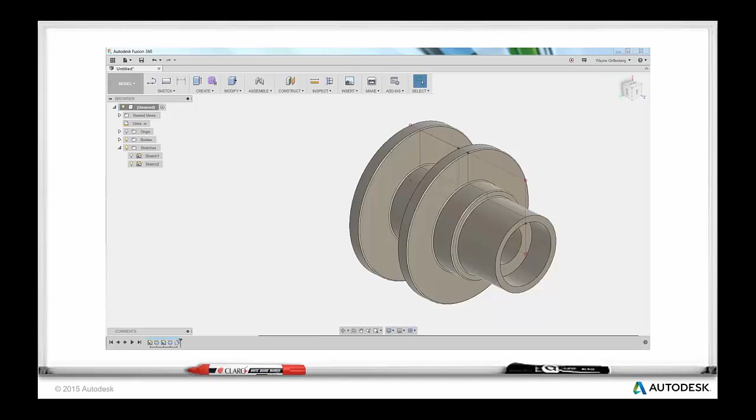Okay, this is the basic part we're going to draw up, a simple pulley, and revolve it around. And then we're going to put some toolpaths, some contour toolpaths, a facing toolpath, grooving toolpaths, and then we'll even get a boring bar to show you how to bore out the internal components of the part. So that's what we're going to do. So let's just jump right into it.

I'm going to bring you into Google. So I'm going to log into my project. I'm going to go over to this Fusion Team. When you start to work with your projects, you're going to get into a hub. And in the hub is where you're going to save. You're going to log in and save your project when you initially start working with Fusion.

I have some projects here that I'm working on, as well as I can see activity of what's happening in those projects. Some of these are shared with me, some of them I share with others. And they were able to invite me. I can go in and log in and see some of the parts. And when you invite somebody to your project or your hub, you can control the access they have, whether they can create projects, edit parts, change parts, or even upload parts into your project.

So I'm going to jump into this Fast Track to CNC Programming. And these are some of the parts we did last week. And I can also see that the project member is me, and I can add and invite others simply by putting their email in here to send out the link that they can add through their email. I can add them into this project. They can join in, and I can manage what level of access they have.

I can also see these projects in a different way. If I go into the grid view, I can see I have some folders here as well, and I can also see I have some parts that we worked on last week. So we downloaded this vise. We were able to turn it into an assembly inside of Fusion, and we were able to bring this part. We created an adapter plate for going from a carburetor to an intake manifold, and I was able to bring it into that assembly and machine it.

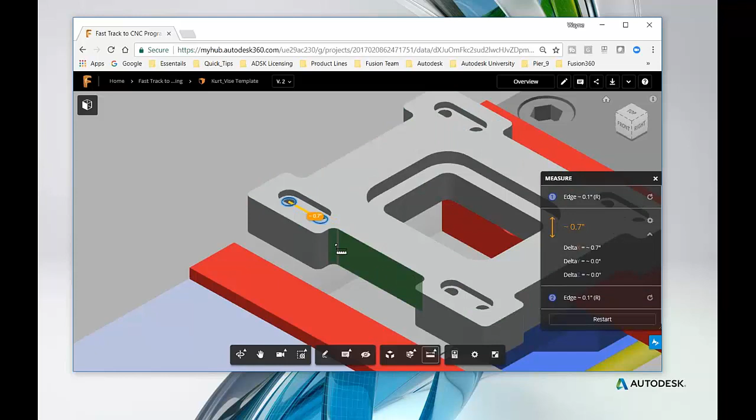If I wanted to get a section view, I can easily do that too. I can say I want to add a section view through the center plane here. I can drag it and I can see what's going on, let's say, inside of those holes right there. I can even see a different angle in that section view, and I can just flip it around like this and I can see it right in the view inside of my browser here. So I can turn that off.

I can also go and do an exploded view. So if I want to explode out and I want to see what the assembly is made out of, I can easily do that. You could set yours up if you want to look at the functioning or what's inside of one of your components or your assembly. You can easily do that here as well.

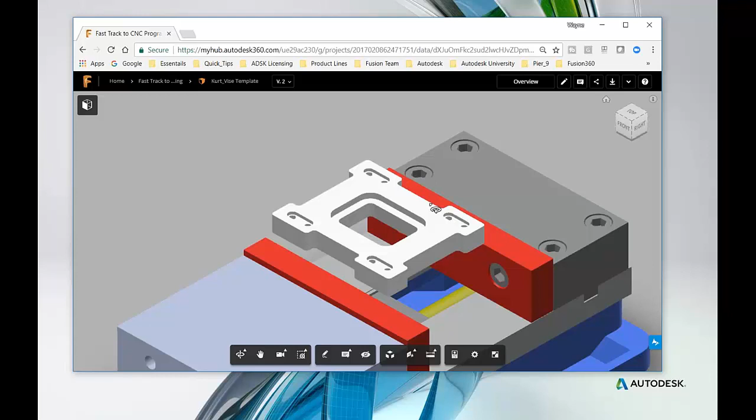And again, I can share this with anyone. If I want to share this, I can just simply go up to share, and I can send a link to a customer, to a colleague, to anybody I'd like to come in and see what this looks like, simply by copying this link and sending them.

I can choose whether I want the people that I'm sharing it with to be able to download the assembly to their computer, and if I do, I can also choose to have them put a password in that they'd have to plug in before they can download it. Or you can simply turn that off and allow colleagues to be able to download freely or get into the project. So I'm going to close that out.

There's also ways, if I want to export, just to let you know, you can export to many different file types right from this browser view. It'll export that assembly out as different archives and different types of exported data.

If I wanted to edit it, just to let you know, we do have the preview where you can edit right inside the browser. It just adds flexibility for you to be able to design. Say you're not in the office, you might be on your iPhone or your iPad. Well, actually, in this case, you wouldn't be able to edit it on your iPad yet.

But if I had a Mac, I can open it inside of my browser on the Mac, or I can open it on my laptop if I'm away from the office and do basic edits on the parts, and be able to add that so my colleagues can see it. So when I get back into the office, I can save that idea. So it adds flexibility. But right now, it's only in our preview mode today.

I can also edit on the desktop, which we're going to do here. So I'm going to go and click Edit on Desktop. So I'm able to bring it up, and now if I don't have Fusion installed, if I'm on a PC or a Mac, it gives me a chance right now to download and install it. Now I do have it installed, and it's opening in the background.

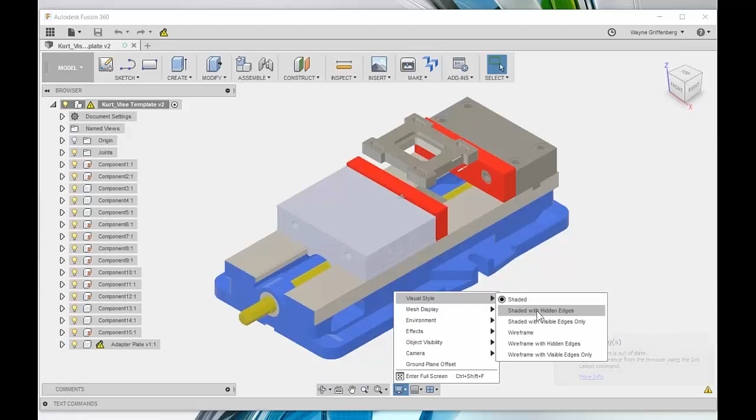I'm going to change my visual style real quick, just so you can see. I'm going to go into Hidden Edges like this. And you also see it has an update. That means my part has changed since I opened this last. And I can click that update and it'll update the part.

But today we're not going to work in this assembly. We're going to create a brand new part that we're going to turn on our lathe. But I just want to show you that we can get from the web interface directly into our hybrid client, right on our desktop. And I can continue to work in the CAM on this part. I can also go and change any of the aspects of the model really quick.

So right now I'm not going to update it. I'm going to close out of this assembly, and we're going to start from scratch to make that pulley part that we have on our napkin sketch. So I closed out and I'm starting fresh. This is our canvas view. I'm working in the model workspace.

And in the model workspace, I have on the ribbon bar all of the features and all those tools that you would be used to working in a 3D interface like this to be able to create parts, create sketches. You can modify, do direct editing right on the part if you uploaded a part. I can show you that as well. And also if we're working with assemblies and how we can apply joints to mimic what's going on in the real world in our assembly.

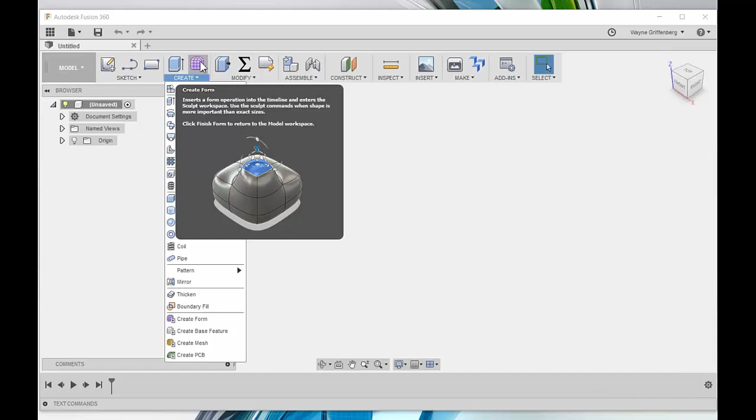We can also create from primitives, but we can also create form parts. This is our T-splines where you can mold like you're working in clay and then make that become a solid that you can then machine and work with later on. So I'm going to go and start a sketch. I'm going to go into view down here first.

Before I start the sketch, on my browser, I have the ability to change whether I'm working in inches or if I want to change that over to millimeters, I can do that really quickly. In fact, you can do that anytime during the design, and it's flexible and it'll switch your measurements over even in the CAM interface as well.

So here I have some views that I can quickly move to as I'm working through the model. And speaking about views, I also have the view cube up here that I can also manipulate and move around to get any view that I want. And you notice it also gives us the X, Y, and Z axes, so we can see where it is on top, front, or right of the part, and all the way around the view cube.

I'm going to expand this down a little bit because I can also show the origin. We have it turned off now by default. That little light bulb I can turn on, and you'll see all the axes really quick. You'll see the planes as well as the axes, the X, Y, Z axes that we can work on.

And also down here, I'm going to have a timeline. So as I start to create sketches and bodies, you're going to see it expand on the timeline here. And we can always go back in time to make changes that we need, keeping it very flexible in this interface.

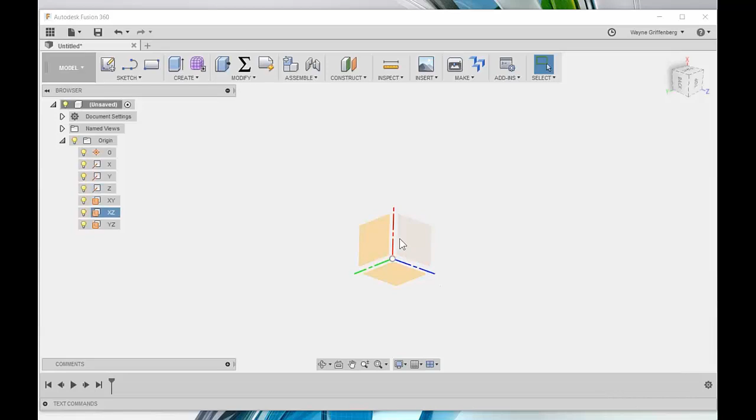So I'm going to work on that same plane. Notice as I highlight that plane, it also highlights in the browser as well. So I can easily go in here and right-click in the graphics view and create sketch. I can also right-click in the browser and create a sketch, or I can also go up here and create a sketch and then select the plane. So it's very flexible in the way that you like to work to be able to get started sketching on a plane. So I'm going to do it right from here from the graphics view.

I'm going to right-click, create sketch, and it brings me into that view. So I'm going to work in this quadrant where my X axis is positive, and I'm going to revolve around the Z axis, and this will be my 0, the front of the part. Notice when I created the sketch, it also gave me a folder here with a sketch in it, and also in my timeline I have the sketch we're working in.

It changed over to a grid view, and as I start to scroll out, you'll see the number lines start to change, so I have a good idea of the space I'm going to be using to be able to generate this part.

The first thing I want to do is create a rectangle that's the base of the part, my stock if you will. So I'm going to go up to Sketch, pull this down and go to Rectangle, and I have some options on the type of rectangles I can make. A simple 2-point rectangle, I can hit the R key on my keyboard, or select the 2-point rectangle. Notice when we do have keyboard shortcuts, you can see it right here for trim, for offset, for line. But I'm going to use the rectangle.

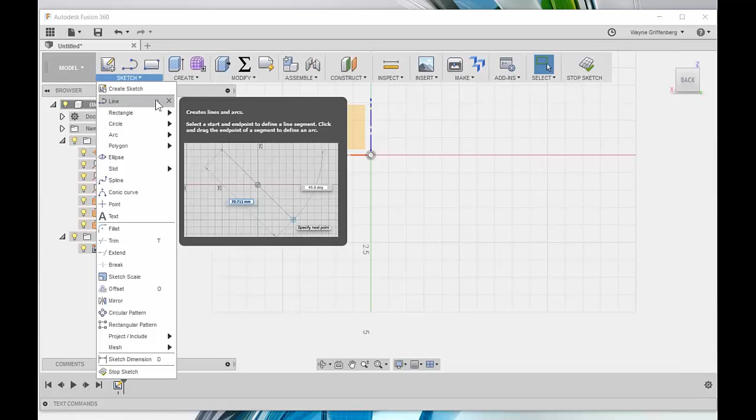I'm going to click 2-point rectangle, and when I do, it brings in... let me move this real quick because it looks like one on my other screen. Here we go, it brings in this sketch palette. So as I'm working in this interface and started a rectangle, it brought in the rectangle feature on my sketch palette. So I still have a chance to change that over if I want to.

But I'm just going to start the 2-point rectangle, and I'm going to hover over the origin. Notice it snaps into the origin. If I start to drag, you see it rubber bands this rectangle shape, and it also applies some dimensions that I can plug in. In this case, the length I want to be 3 inches, so I'm going to plug in 3 and hit the Tab key, which locks in that dimension. I'm going to put that little lock on there, and it went over to my x-axis dimension.

And I want this to be 3 inches diameter, so I'm going to give it the radius. I'm going to say 1.5 and hit the Tab key again, and that locks it in. So now I have a locked rectangle that's 1.5 by 3, and no matter which quadrants I roll around, it keeps that locked in.

So I can choose the quadrant that I want that rectangle to be in. I'm going to select this quadrant here, just click there, and it now gave me this boundary area. This is a 1.5 by 3 boundary that I'm going to revolve around the z-axis. But notice it gives me this region. As I hover over it, I can click it and it changes and selects the entire region.

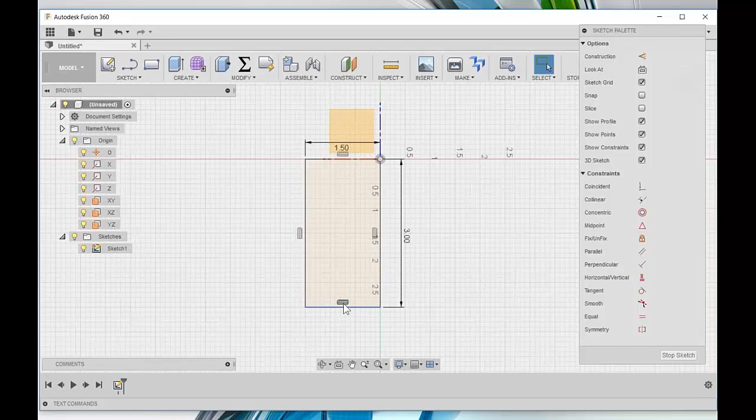I also have these constraints. So it added constraints in here as well - horizontal and vertical constraints automatically added because it recognized the way I'm drawing on these axes. If I ever want to change them, I can easily select the constraint and delete it, and now I can add an angle there if I wanted to. I can easily add it back, add coincidence, or even add other types of constraints to the model. If I want to make these lines perpendicular, I can easily add that in. In this case, I'm going to hit undo because I did want to have that vertical constraint there.

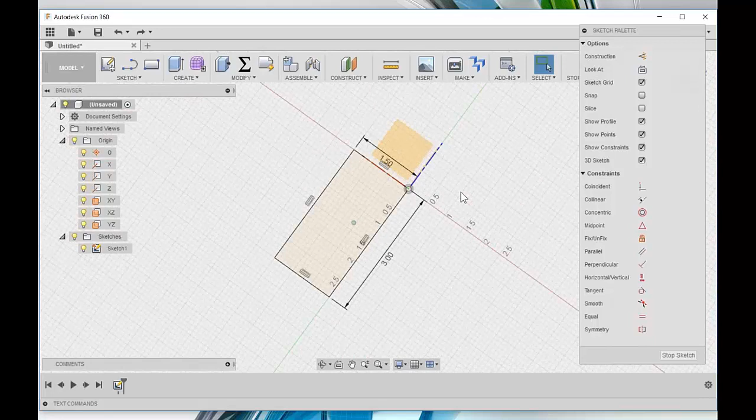Okay, so now that all my lines are black here, that means I'm fully constrained and able to create a body. So I'm going to rotate this around the way I like to see it revolve, almost like an isometric view. I can also select this corner of the view cube, and it snaps and makes that an isometric the way I like to see it.

Okay, so I'm going to revolve this around the z-axis. I'm going to go up to Create, and create a revolve. So I select Revolve, and it brings me into this view. Now notice I didn't have to exit the sketch - I just went right up to the feature and said I want to revolve it. So the first thing it asks is, what's my profile? I don't have to select individual lines, I just select that face right there.

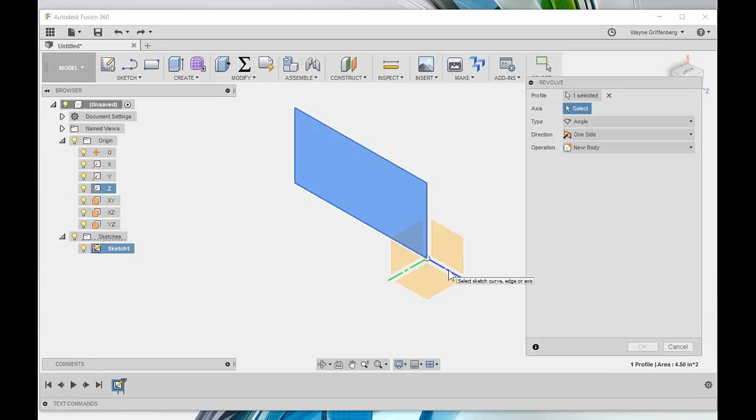And then the next thing is, what's my axis of revolution? Now if I drew a line, I can easily select that line. I can also select the origin, the axis of origin, this z-axis, and it revolves around that z-axis. It creates a new body. I have some choices where I can join or cut, but there's no other bodies to cut from, so it just created a new body. I'm going to say OK, and now I have this body here that we can work with.

So now that's going to represent the base of the part, and now I'm going to go back in and draw in another sketch the features I want to cut away for the pulley. I'm able to go in and create some geometry, revolve it around, and now I want to add another sketch.

This time I'm going to go up to Sketch, choose a plane. I can even select the plane right off in the graphics view, in the canvas view, and now I'm in this plane in the sketch, back where we were before. This time I now have a body, a revolve body on my timeline, and I also have this new sketch we're creating, as well as the sketches and bodies in my browser.

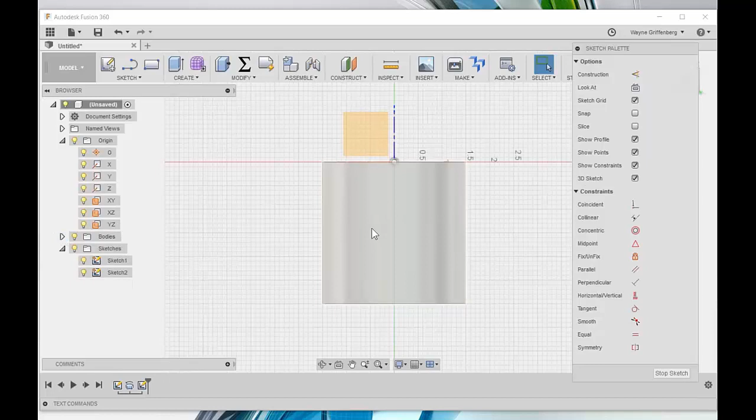Now I can start sketching in here with a line, but the body might get in the way, because as I start to click and work, I see it highlights the body. If I'd like to hide that, I can easily hit the light bulb and it keeps the body, but now it hides it, so I can continue working on my sketch.

Notice that both sketches are turned on. If I turn off the old sketch, it turns off the old geometry. I'm working in this new sketch here, but I want to borrow geometry from that original sketch, so I'm going to turn it on and project these lines into this new sketch.

Now I can hit the P key, or go to Sketch, Project Include, and hit the P key for project. That means I'm going to project that geometry from the old sketch into this sketch. Now I can do it that way.

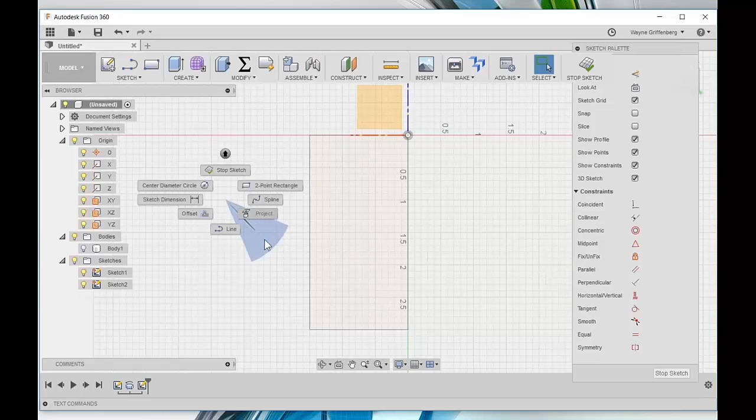I can also right-click in the graphics view—we call this the marking menu—go down to this sketch feature, and I can project by moving my cursor down to about 5 o'clock, maybe 4:30, and notice it touches that project option. I can do it this way and get right to that same feature. So you can always right-click and get to the functions in the marking menu.

So I want to project those lines. It brings up the project tool right here. Now I'm going to project this line and it turns pink—this line, this one, and this one. And now I have a region, and it projected those four lines. Now I have a closed region.

I'll say OK, and I'm going to turn off the old sketch. So if the old sketch does change, my new sketch will change parametrically with it. Now I have the basis of the profile, and I'm going to draw my features in here.

I'm looking at my napkin sketch of the pulley, and it looks like I have a bore going through, so I'm going to start to draw that. Again, I can hit the L key to start a line, or I can go into my sketch palette here and choose line.

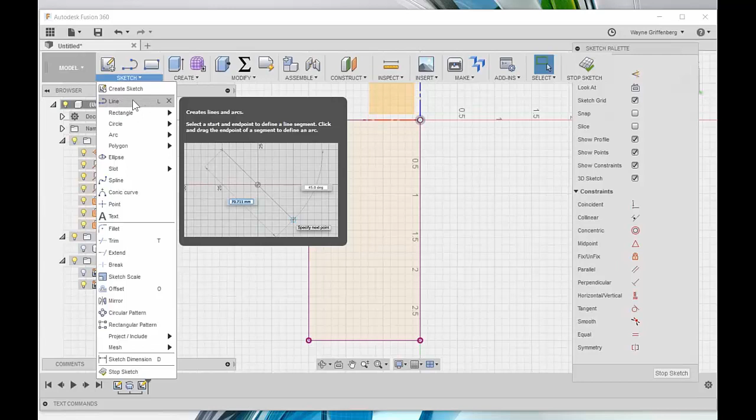And remember, we can also right-click, go down to sketch, and choose a line. I can go straight down to 6 o'clock, and that'll give me a line—it remembers the gestures. So as I'm working, I'll do that a couple times. It's easier than having to click and choose; you just right-click and pull down what you're looking for.

So now I have a line function attached to my cursor. I'm going to hover over, and notice as I hover over these projected lines, it gives me that snap, the intersection snap right there. And if I go to the midpoint, it gives me the triangle for midpoint.

You can learn a lot more about these constraints if you go to our Autodesk Knowledge Network and search for constraints in Fusion 360. It'll give you a lot more background on how the different constraints work.

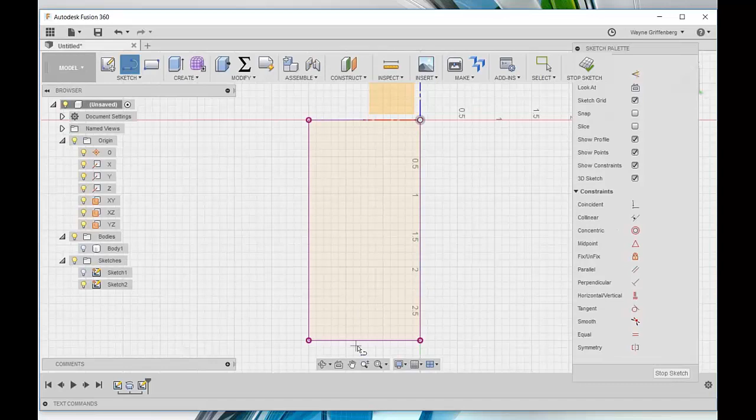So I'm going to snap to this intersection and draw arbitrarily. Notice as I start to stretch a line, it's now snapping to perpendicular to the line I started with. I can choose a dimension, plug a dimension in here, and I can also give it an angle. But I'm going to freehand draw it the way I have it on my sketch.

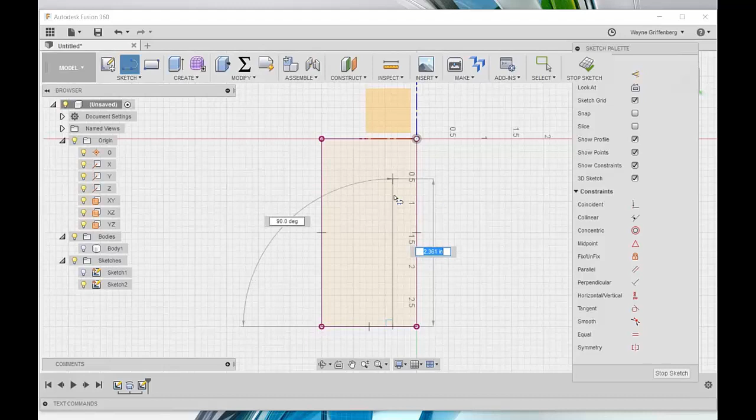Later on, I'm going to add constraints and then add dimensions, so I can lock down the constraint and fully constrain this sketch. For right now, I'm just going to draw it by eye, so I'm going to click there.

I get this green check if I want to complete the line, but I want to continue. So if I start to go perpendicular to that line, it gives me that perpendicular constraint. I'll do the same thing and go up till I finish and terminate at that top line. But notice it gave me these perpendicularity constraints automatically, recognizing that I want perpendicularity in those lines.

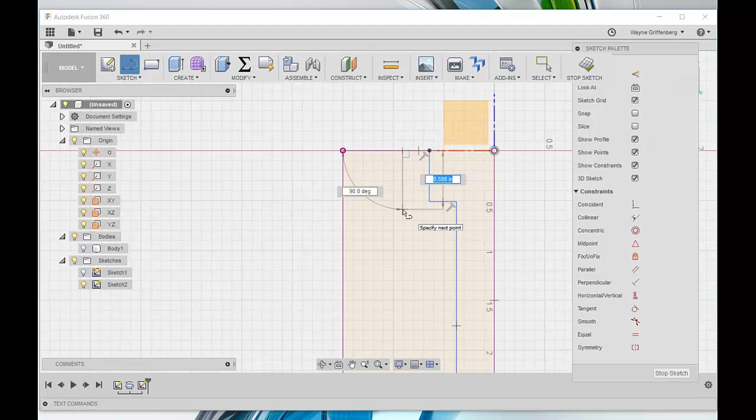I'll do the same thing. While I still have the line command functional, which is another great thing in Fusion, even though it terminated, it still gives me the chance to continue the line function. So I'm going to select an area right in here, and it's actually a threaded feature, a threaded boss that I want to have on the front of it, that leads up to my flanges.

Again, I'm going to draw it like I see it on my napkin sketch. I'm not putting anything exact in here, but I'm going to draw up to my first flange right there. I'll hit escape while I'm here, and I just want to show you - as I was drawing these features, I have a closed boundary, but I didn't have to finish off and draw other lines. If I hover over, you see I have a boundary I can select individual boundaries to work with.

That's one of the great things about Fusion - once you close this, it doesn't have to be a completely closed boundary. It recognizes automatically that as a section we can work with. So now I have 3 individual boundaries or regions that I can work with to model.

I'm going to add one more, which is the flange between the 2 flanges in our pulley where our belt's going to ride. So I'm going to go up and add a rectangle. Again, if I right-click, go down to Sketch, and in Sketch, if I go up to about 2 o'clock, I have a 2-point rectangle. This is a neat thing - you don't have to wait for it. If I do this and drag down then up, it gives me a rectangle.

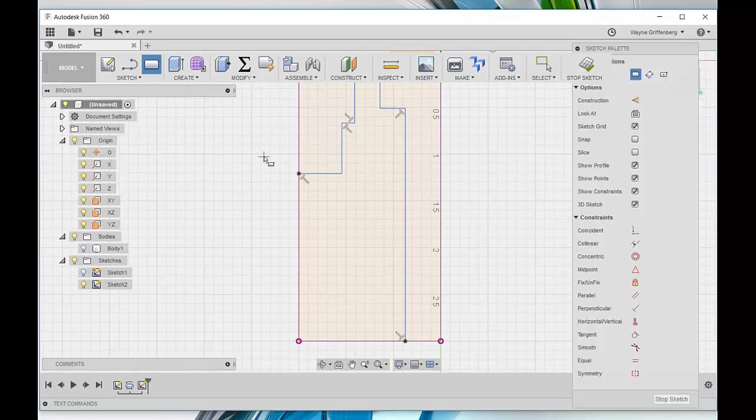You see it attached to my cursor? You can do a gesture - if I go down and then down, it gives me a line. Rectangle up, 2 o'clock, it gives me the rectangle. So it's really a gesture control - you can quickly get to your functions just by using gestures like that. So that was a right-click gesture.

So I'm going to snap here, and I'm going to drag this rectangle down, and that's going to be the pulley section in between where my belt's going to ride. So again, now I have 4 regions in space. We're not locked down - if I drag any of these corners, you see our blue lines are telling us that we're not fully constrained. So now I want to constrain these.

So the first thing I do is now I want to dimensionally constrain this. I often like to work, when I do turn parts, from my datum out to the diameter first, and then from my 0 point back from my datum. It's just a habit - you don't have to, but it's often a way to control your dimensions as you're working through turn parts.

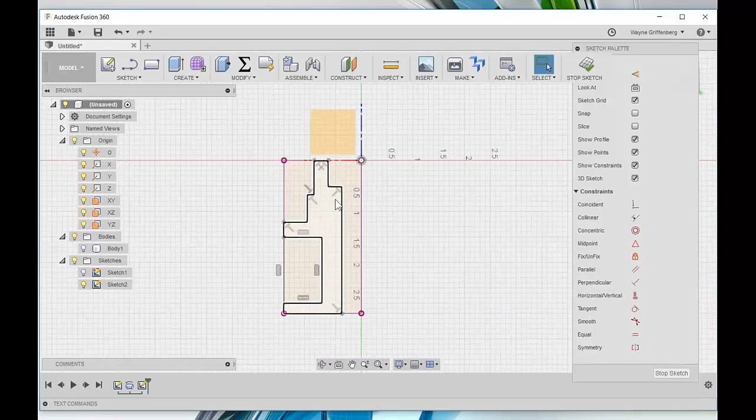So I'm going to hit D for dimension, or again, I can right-click down to Sketch, and our dimension is at 9 o'clock. As you start working with this, you should remember where these functions are, so I can easily right-click down, then over to 9 o'clock, and I'm on dimension. Of course, I can always hit D on my keyboard. But let's start this - I'm going to go from my datum point out to the center of where this bore is going to be.

Wow, I did pretty good - that's going to be 3/4 in diameter, so I'm going to make that 3/8 dimension here. Again, it still keeps my dimension mode on, so I don't have to exit this. I'm going to go from my datum point out to where my bored out section is - this is going to be my front bore inside of the threaded housing. So this will actually be 0.625, so I'll go 5/8, hit enter.

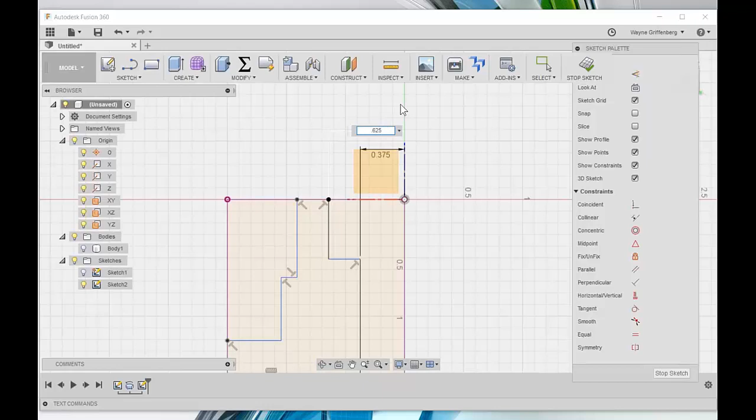So I'm able to plug in those dimensions, and as I do that, notice the lines are turning black - so they're being constrained in the position where they're at with the dimension. I'll do the same thing here. Oops, I think I might have selected the dimension instead of the actual datum. I did it again - try it this way. And now I'm going to make this one 3/4 of an inch.

Same thing here. I can also grab this line here so I'm not grabbing the dimension edge. And this is going to be 1 inch. Okay, we're almost there. And now I want to be able to get this dimension for our pulley here for the belt area. Let me go and put that. And that's also going to be 3/4 of an inch.

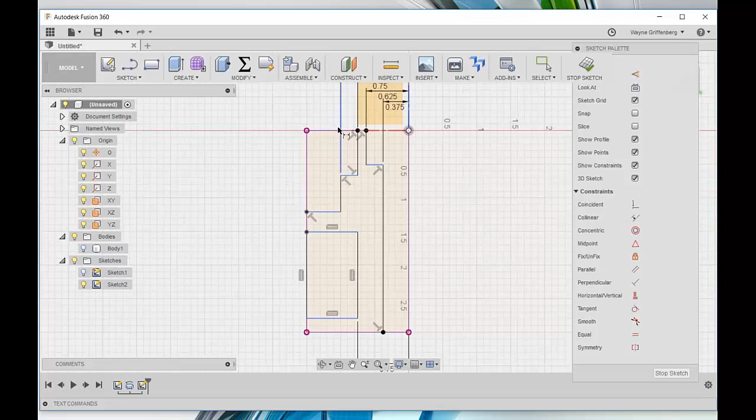All right, so I'm working from now the datum back, my 0 back. So in my bored out section right here, I'm going to go from the datum. I can grab the line to this edge. And that's going to be a 1/2 inch. Okay, and this edge is going to be 3/4 of an inch. And now where my flange is going to start, I'm going to zoom this back. And my flange is going to start at 1 1/4 inches back. Actually, I want that to be 1.5 inches.

So I'm going to go and make this one from here to here. That's going to be 1 3/4 inches. And I want a 1/4 inch flange, so I'm going to change this one. All I did is double click on it. I'm going to make that 1.5 inches. Now I have a 1/4 inch flange in the front. I'll do the same thing here. I'll select this one here, and I want this to be 2.75, and now I have a 1/4 inch flange in the back.

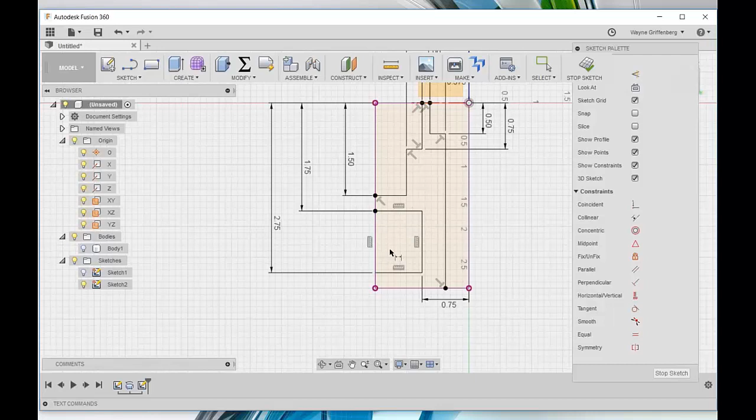Okay, so now I'm fully constrained. I'm going to hit escape, and I have these regions to work with, and now I don't have any more blue lines, so I can't drag them around. I'm completely constrained, and I'm working from my datum out and my datum back. So now I want to revolve this. Now I want to show you we can revolve the same way we did before. So I'm going to rotate this around. I'm going to go up to Create a Revolve.

And now if I select these regions that we want to cut out, I'll select these 3 regions. And it's easy to select regions right out of the sketch in the graphics view. And I want to revolve that around the Z-axis. And when I do, it gives me a new body, right? And I know I have like these 3 bodies floating in space kind of here, but it's going to give me 3 bodies because it doesn't see anything to cut from.

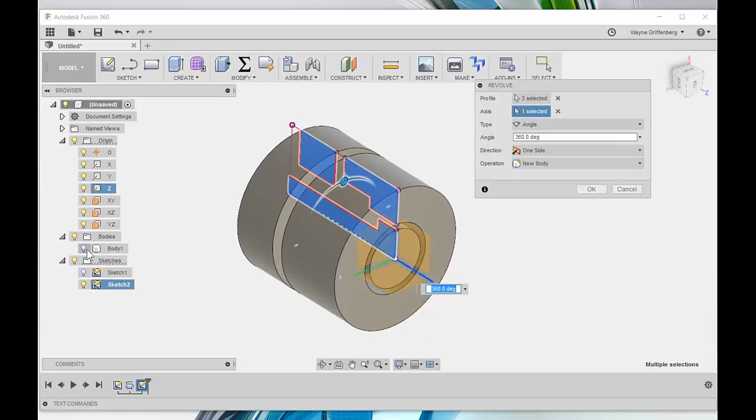We did our initial body here. If I turn it on, it now recognizes that there's a body there and it switched it over to be a cut. Really smart how Fusion recognizes those bodies. But of course I can join it if I want to have a multi-body model, or intersect. But in this case I do want to cut away. And I'll just say OK, and now I have the net shape of what we want to cut on our turn machine, on our lathe. So I'm going to hide that sketch for a minute.

So we have this net shape, but what I'd like to do is get some radii on here. I have 30 thousandths radii all the way on all these edges, these transitions here. So I can easily go up and I can start to do a press pull. Now this is a direct editing solver that we work with. In other words, I can grab this face and start to press and pull it, and you can make a dynamic change that way. It's parametrically saved in the history when we do that, but it doesn't match the sketches and what we were working with. So I don't really want to do that at this point.

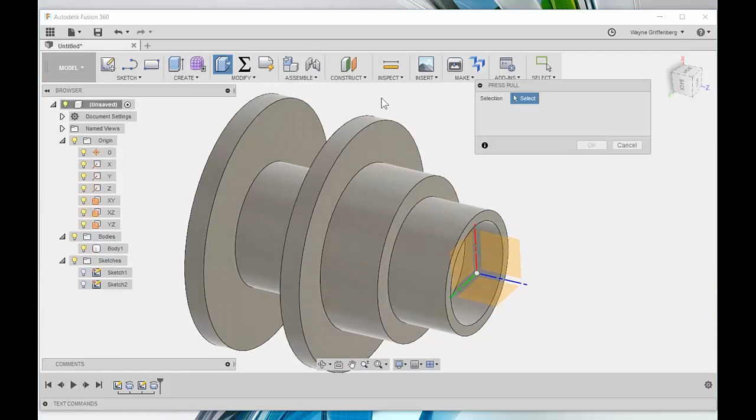What I do want to do is I'm going to add a fillet. So I'll show you a trick. If I grab this edge I can start to pull this down and make a fillet, and I can easily make that 30 thousandths, and I can start grabbing other edges. But here's a quick trick for you. If you want to make all these edges have a radius of 30 thousandths, what I'm going to do is select the back face so I have a linear face that I can select from.

If I go to press pull, I'm just going to put a box around all these edges like this. And it automatically grabbed all those edges, and now I can easily make them a 30 thousandths radius and say OK. So you can easily put a window around and grab edges to be able to put fillets on really quickly and easily.

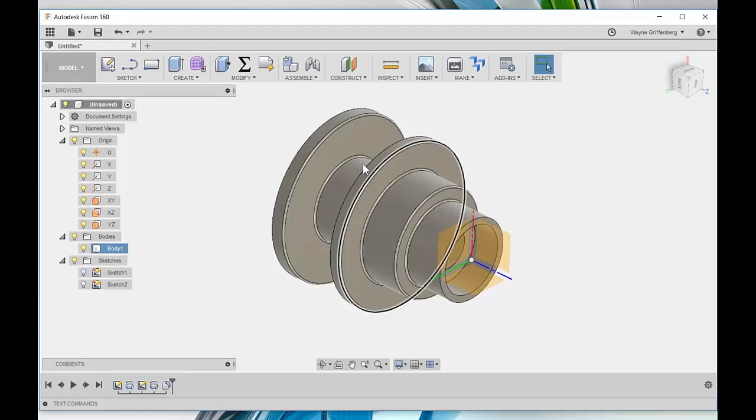Okay, so we're pretty much there. I'm going to turn this part and we're going to switch over to our CAM interface to be able to turn this down the way we want to see it in our machine. I'm just going to hide the origin to make it easier to see when we do our setup. Okay, you don't have to, but now keep an eye.

So we have this timeline. As I had mentioned, if I go back in time before we had a fillet, we can always make changes. And if I go back in time, you can start to see the features start to shrink up on the browser as if they weren't even created yet. So it's easy to be able to go back in time, make changes, and pull those changes forward through time. I just want to show you that's the flexibility of working with our timeline in our interface.

Okay, so I'm going to shrink up the browser, and what I want to do is switch from our model space to our CAM workspace because I want to make this on our lathe. So as I work through, we're working in a model space. Just to show you, we have these other workspaces that come with Fusion. There isn't any module that you have to download. There aren't any add-ons.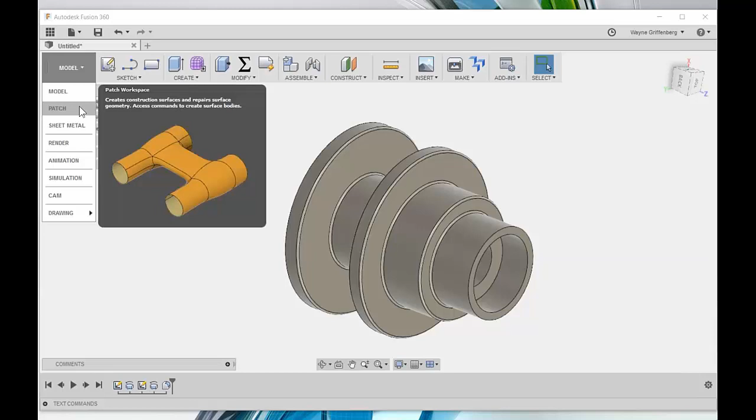You can work with your surfaces. If you do a lot of surface work and working with your wireframes and putting surfaces on, you can have the patch workspace to work in. If you want to cover holes in your models, you can easily do that here. Sheet metal: if you work with sheet metal, this is newly added last month into Fusion. It's an amazing workspace to make your sheet metal parts really super easy and robust.

Rendering, full ray tracing, so you can get a photorealistic version of your part or assembly, and you could share it on your website, share it with your customers, your clients, put it on your Instagram channel, and quickly be able to make those photorealistic views of your part. Animation, if you want to show off how your design works, your assemblies, to be able to show inner working parts quickly and easily, you can make your animations here.

As far as simulation, this is our Nastran solver that works inside of Fusion, where you can test for the robustness of your design. You can do stress-strain analysis, fluid flow, and a lot of those tools inside of simulation to check to make sure your design is going to be robust.

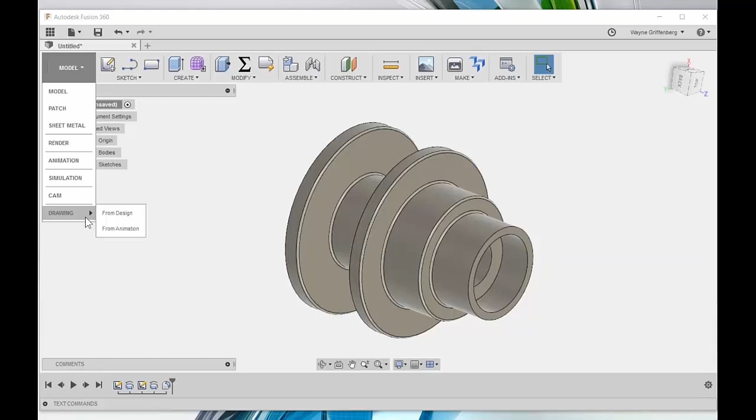We're going to spend some time here in CAM, but also we can, of course, make the drawings that we need. If you have vendor drawings you're trying to make, or even for customers, you have all that familiar functionality that you're used to if you're used to working in a CAD system to be able to do your drawings and dimensions and section views. So let's go into our CAM workspace.

So I'm going to click over, and our ribbon bar changes over to all those functions we need to be able to machine a part out. And our browser switched over to our CAM interface, but we can always get back to our design, expand down, and get to those sketches we need. So if you want to choose geometry from a sketch to machine and bodies, you can always expand this down and get back to your CAD component without having to go through another workspace. So in the setups, we're going to set this part up the way we want to see it on our lathe. So I'm going to go into setup.

The first thing we do, working from left to right, is do setup. And again, as I hover over, I get that in-context help. I get the manual right there when we need it. So I'm going to select setup. And now it's set up as if I'm going to mill this on, let's say, a milling machine, right? So it has a cube. I'm set up for operation type milling, and I can easily set that up if I want to try to mill that out, which would be interesting, but we could.

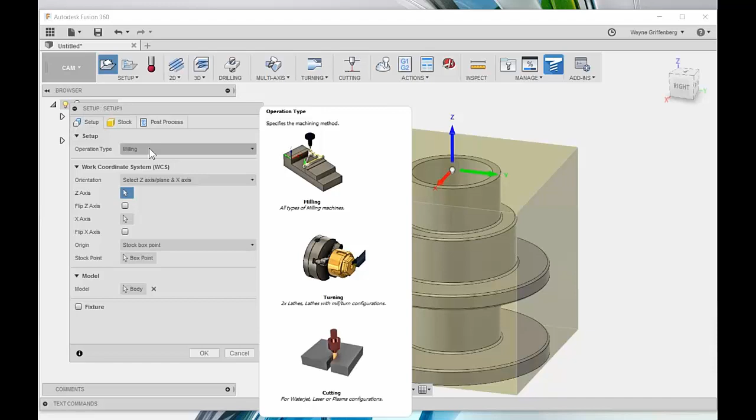But just to let you know, the same workflow that we're going to follow works if you're in the milling interface, the turning interface, or if you're doing cutting on your water jet, laser, or plasma machine. So we can easily switch over to turning mode. When we do, it gives us the information needed for being able to turn. So we can do turning or mill turn if we have any milled faces. If we're doing live tooling, we can easily set it up. We can choose whether we're working on our primary or secondary spindle.

Our radial dimension mode we can work on. If we're doing diametric mode, we can do that as well. So the first thing it wants to know is, where is my rotary axis? But because I drew this part up initially with the sketch that revolves around the Z axis, I don't really have to choose that. It's automatically in the model.

But sometimes you might import a model or draw one where the Z is in the opposite direction. You can easily select any face or any edge that's revolved around that rotary axis. Like I could select this tube face and it would select that to be my rotary axis. That's the center, revolves around my Z. I didn't have to, but I just want to show you that we could do that. We can also flip the x-axis if we need to, just so you can have your part match the way that you set it up in your lathe.

Okay, so if you have any features that cross the XZ plane, like if you're doing any cross drilling or live tooling or any features that's going to cross that plane, I recommend making a spun profile. Just check this, and what it does internally, it makes a profile of the features that are completely on the edge of the part that rotate around that aren't affected by those cross features. So it's a way that you can turn, and it'll use that turn profile to do all the two-axis work, and then when you go to switch over to live tooling, it doesn't interfere. So you won't see those interferences.

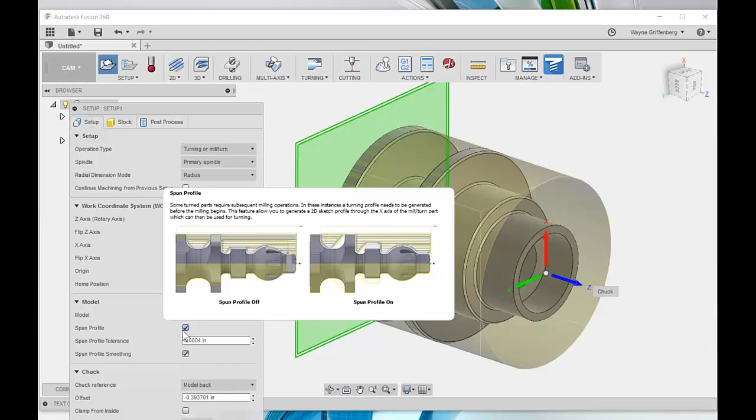So we can leave that on. We can make a spun profile. I often turn it off if I'm only doing two-axis because it's a lot quicker in your toolpath calculation. So we can do that. We can make a spun profile. We can also set up the chuck. But I'm going to come back to this. I'm going to change my stock shape.

So in the stock shape, we have flexibility on the way you set up your stock. Often I like to do a fixed size, not box, fixed size cylinder, where I can just plug in the dimensions. So I can do my width, my stock diameter. I can say if my stock diameter is going to be 3 1/4, I can easily plug that and I can see that's my bar stock dimension right there. If I want to do my length, let's say I'm going to make this 4 inches. I would actually probably do 4.5 inches.

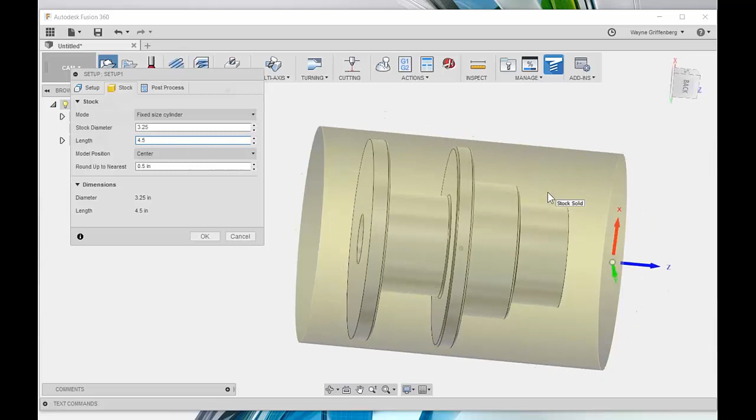And now it's from the center. Put the part right in the center of that stock. I'd like to leave 100 thousandths between my front of stock and the front of part. So I can easily change this offset from front and add 100 thousandths that we're going to take off. Sometimes you want 50 thousandths or 25 thousandths, but I'm going to leave 100 so we can see it clearly. So I put 100 thousandths. I have some room in the back.

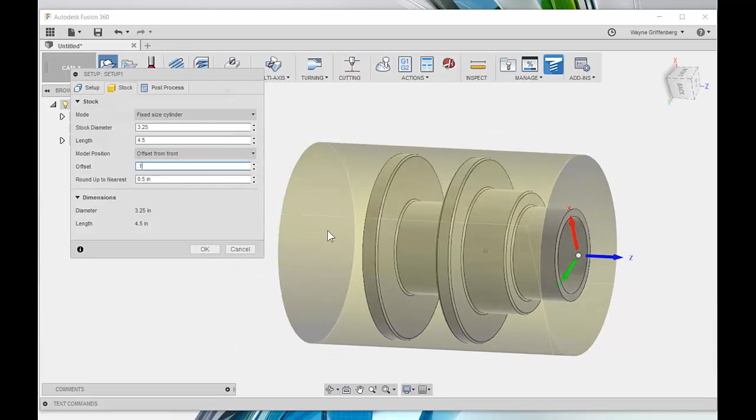Now if I switch back to the setup, I can see exactly where my chuck is going to be grabbing onto the part. And this is good because I want to make sure my toolpath doesn't come in and my tool holder doesn't hit the chuck. So now I have flexibility from my origin where my chuck is going to grab onto. I can plug those numbers right in here, and I can say negative 0.75, and now I know from the model back I have 3/4 of an inch. So I can control exactly where the part is in the chuck so I don't end up crashing into it with my tool.

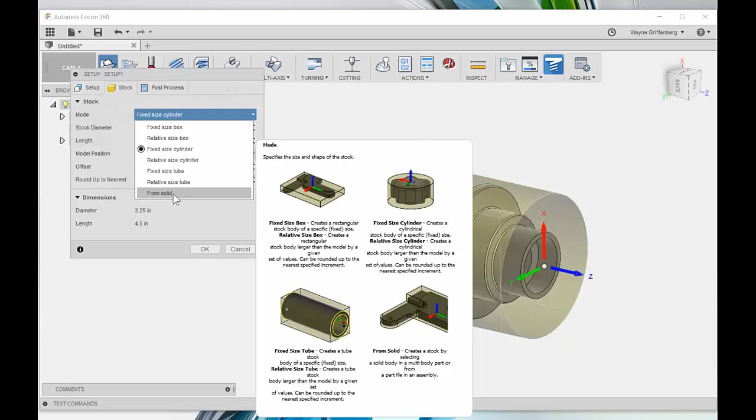Okay, so I'm setting up the chuck. Our stock looks good. Again, some flexibility. If you're ever working from a cast or a near net shape, maybe a forged part, you can have that in this part as an assembly and select that solid out, and that becomes your starting stock. If you're working from an STL model, that'll work as well. You could choose an STL to become your stock, which helps with secondary and tertiary operations. So I'm going to leave this as a fixed size cylinder. I'm going to say OK, and now we're ready to start turning.

Okay, so now the first thing I want to do is I want to face off that 100 thousandths off the front of the part. So I'm going to go up to my turning toolpath, and again, if I hover over, I get that in context help when I need it. So I'm going to do a turning face.

There's the operation. So I select turning face, and what I love about our CAM, it's always the same workflow, working from left to right. No matter what toolpath you're working on, whether you're milling or turning or drilling, it's always the same workflow, working from left to right. Selecting your tool, your geometry, your radii, which is your heights from the center out, your passes, and linking. So I'm going to start with a tool, working from left to right, top down.

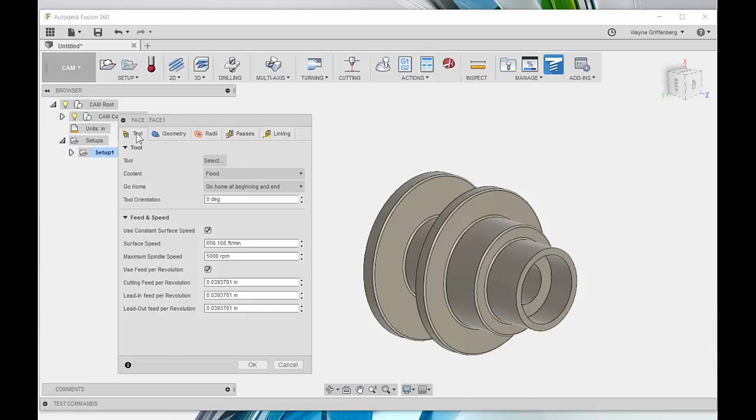I'm going to select the tool out of my library. I highly recommend creating a library of the machines that you're working on. So I was working on the Haas ST20 at Pier 9. So on the Haas ST20, we just filled in what was on the turret. So I highly recommend doing that, or you can also fill in what's in your tool crib as well. It's easy to create a library. Just right-click on the library, go to New Tool Library, and I can easily make a new library and start to add tools to it.

So if I wanted to add a new turning tool, I would just simply go up here and add a new turning tool. And now I can see the standard ISO insert information, and I can choose the standard ISO insert that I have in my catalog, what's in the machine on the turret. The same thing for the holder, standard ISO holder information that I can plug in. So I can quickly get a tool, whether it's an axial tool or radial tool. So I can change the orientation. If it's an axial tool, I just simply make that 90 degrees. In this case, it's a radial tool.

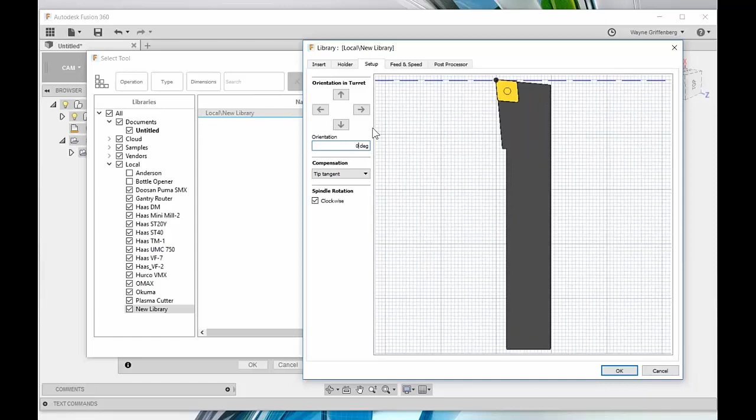And then if I go into my feeds and speeds, I can set up the feeds that I need for constant surface speed, as well as your feed per revolution. So you can plug in your values directly here, put in the tool number, and then of course turn on how you want your coolant to be on as well. Add a comment and OK, and that quick we have a basic turning tool that we can use to turn down a part. I'll select that one out of my new library.

I'll say OK, and that quick, it gave me a face toolpath. I can see that it's going to face that off. I didn't have to select any geometry. It recognized off the model how much material we left on the front of the stock, and it knows where the front of the part is. So I'll say OK, and now I have a turn face profile. So I want to see what that's going to look like before I move on to the next step.

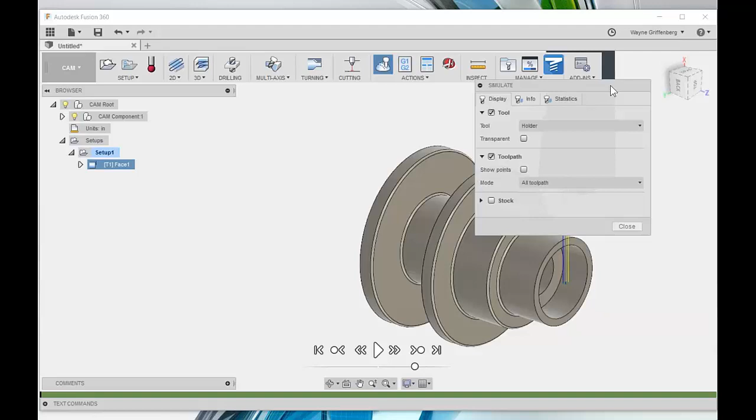So I'm going to go up to Simulate. While I have face highlighted, go up to Simulate. Move this over so you can see it. And I'm going to simulate this part. So I'm going to start to play, and I can see it simulate right on my part. Now I want to see it as if I had stock on it. So I'm going to rewind that back to the beginning. And now I'm going to go to stock, and now I can show it. It might be a little dark on your screen there. I could probably look at it this way.

And now I can play through and watch what it's going to do down to the front of the part. So it's right on my part. I don't have to leave this environment, and I can see what that simulation is going to look like. If my holder hit the stock or hit the part, I would see a red highlight down here telling me where the collision was. As I look at it, I'm going to grab a hold of this view. I'm just going to click in the graphics view and drag it back. And I can actually go back in time, and I can go forward in time. It's taking two passes at 50 thousandths each.

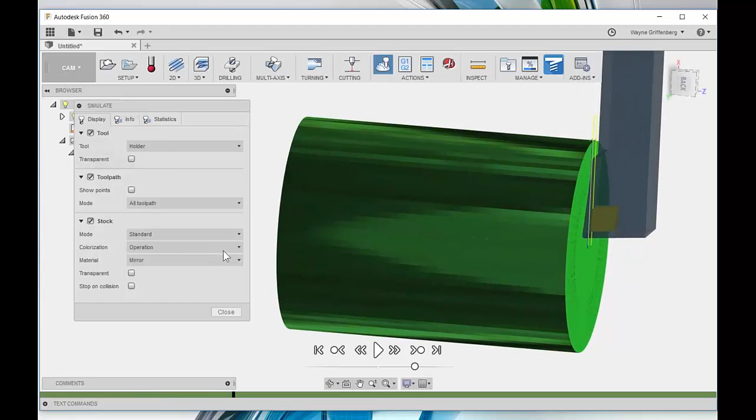Now I'd like to make that 4 passes at 25 thousandths. So I'm going to go back and make a change real quick. I'm going to close out of here, right-click on the face, edit, and in the passes tab, I can easily change that step over. The passes is where we're engaging the material, and I'll make that 25 thousandths per pass. Notice it updates live, right in my graphics view. Visual confirmation that I'm making multiple passes. I don't have to edit in a big box and hope it's going to look right or work right. I can see it right here. So I'm going to make that 25 thousandths.

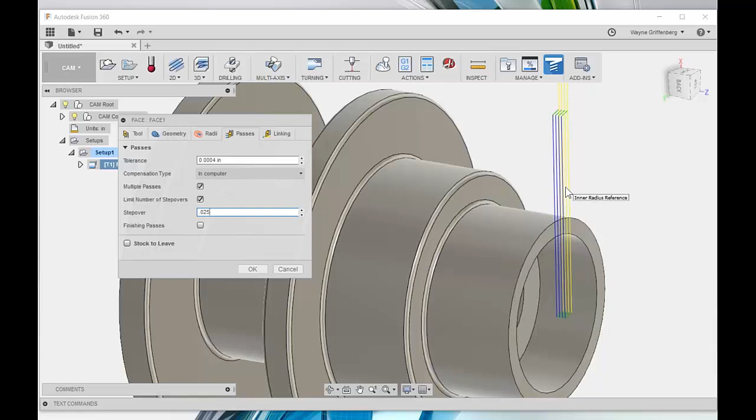I can see it's going to do those 4 passes. I'll say OK, and now I have that face toolpath updated that quick. Super easy to work with. So let's use the same tool, and let's get a profile. Let's profile all this out. Let's rough that out.

So I'm going to go up to turning profile, and I can use the same tool. So I'm going to go in, again, the same workflow. I'm going to select that same tool out of the library, in fact, the one we created. And now in my geometry, I can choose, and it also brought in my feeds and speeds, but I can choose out of here if I want to contain that toolpath.

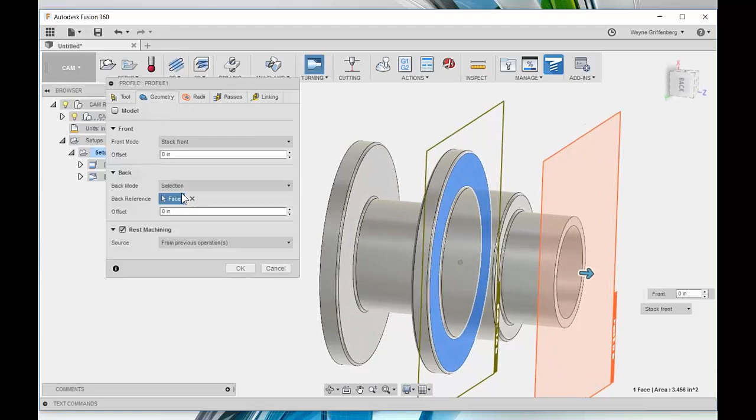In other words, let's say I only want it to go up to this face right here. So I could choose, instead of having it go to the model back, I can select this face, and now it's only going to rough to that face. So in the geometry selection, it'll do the whole model, but you get a chance to confine it to a specific area you want it to go to, adding that flexibility.

Also, because I have rest machining turned on, it's going to recognize that we've already done the face operation, so it's not going to try to cut through that same stock. So for now, I'm just going to say OK, and I'm going to show you that it's going to cut right till it gets up to that face, and then it leads out over that edge. So it recognized on the model that it's going to lead out over and clean that off for me.

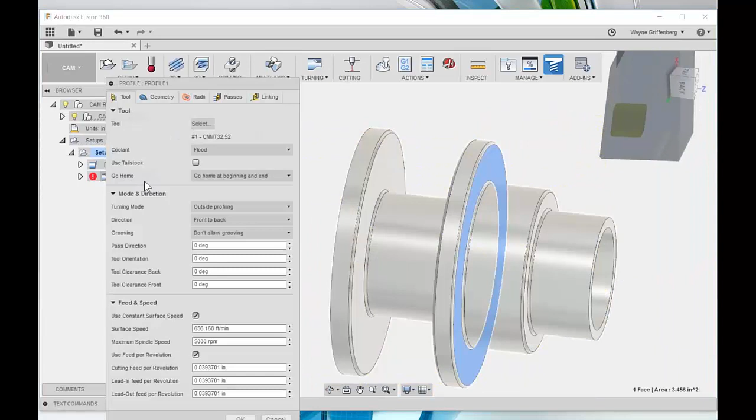But when I wanted to contain it from the front of the part back to that face, that wall right there, that's where it kept the containment going. So if I right-click and I want to edit that, I want it to go past the back of the part, so when I part it off, I'm not cutting through all that raw stock. So I'm going to edit that toolpath, and in my geometry tab, I'm going to turn this back to model back, and I want to do an offset of -1/4 inch.

I can see graphically that it's going to take the tool past the 1/4 inch, leaving room for my parting tool to come in here and part it off. So I'm not cutting through all that stock. I'll say OK, and now we have that rough pass going all the way back 1/4 inch past the part, so we can part it off easily.

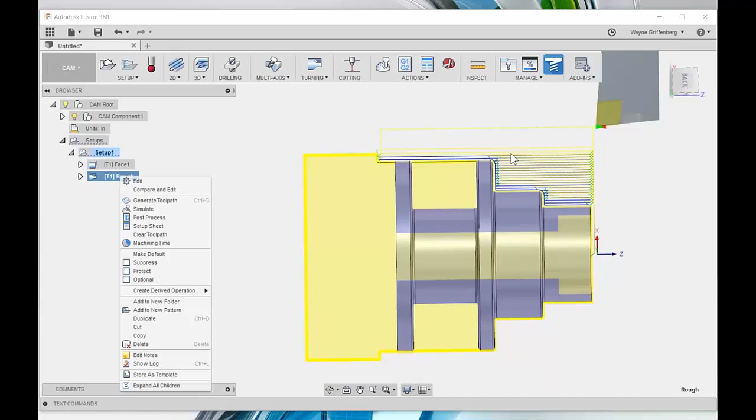So I want to change this. I'm going to soft click the profile one name. I'm going to call it rough. There's my roughing pass. If I want to change the step downs in here, if I want to have a little bit less of an aggressive roughing pass, I can edit. In passes, now I can choose my step over here, and then my maximum roughing step down.

So I can change this if I want my step over. Let's say I want my maximum roughing step over. I'm looking at 50 thousandths is fine. I can easily change that. I can also make my step over 50 thousandths. I can also choose to leave some stock. In this case, we're leaving 4 thou on there. Let's say we leave 5 thou of stock on the walls and on the floors there.

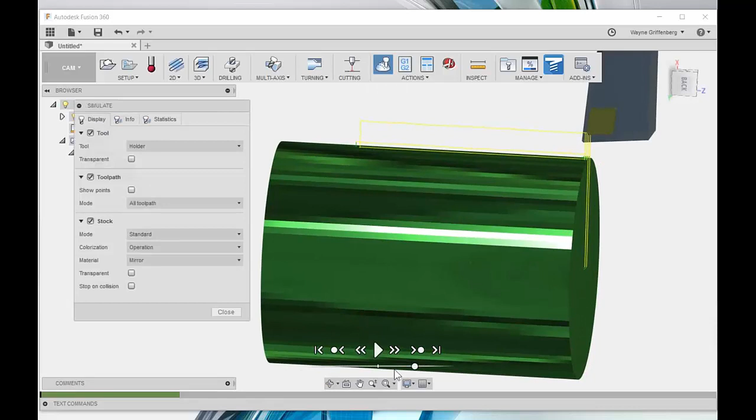And I'll say OK, and now I'm going to come back and do a finish pass, and you can see it's going to leave some stock. So let's take a look at that. I'm going to go up and simulate. So I go to Setup. I'm going to go up to Simulate. We've already seen it do the face, but we'll watch it do those 4 steps into the face. And now it's going to start to do the profile.

I like to look at it from the back view, so I'm going to click the back, and now I can watch it as it roughs out that profile. I can even see it transparent, so I can see the model inside and get a good idea of how much stock I'm leaving on there and how much I have to remove. So that's looking pretty good. I'm able to see the part inside. I made it transparent. That looks okay.

And now I want to do a finish pass on there. So I'm going to close out of here. So now I'm going to take that same rough toolpath we did, right-click, copy, right-click on Setup, and paste. And I have a duplicate of the same rough toolpath. I'm going to make this one become our finish toolpath, so I'm going to soft-click, call it Finish.

Now I'm going to edit that toolpath because I don't want to use that roughing tool. Again, the same workflow, working from left to right. I'm going to select the tool.

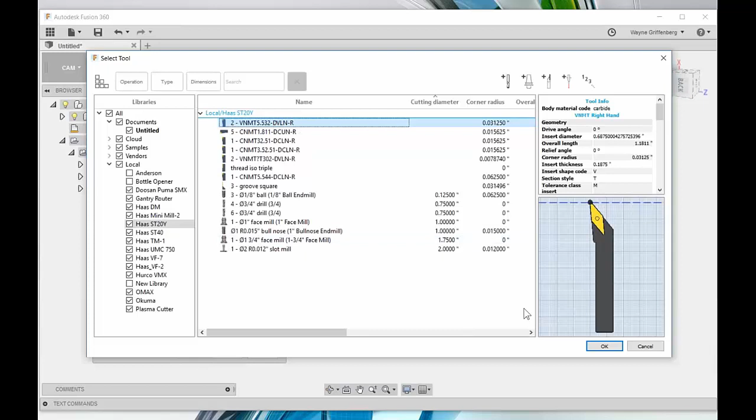Now I'm going to select the finishing tool, and I can create one really quickly, but I know I was working on my Haas ST20Y. That's got a good tool, and I'm going to borrow that in this new machine. So I'm going to go into the finishing tool, this number 2 up here, my 35-degree finisher. I'm going to select that, brings it into the graphics view.

I can see it. I want to use that to finish this profile. So in my geometry, I'm not going to change. It's going to keep that same 1/4 inch behind the part. It's still going to look at rest machining, so it's going to see the previous operation, which is our roughing operation. I'm not going to worry about radii right now, but I don't want any roughing passes. I don't want to leave any stock, and I can also add a specific finish feed rate that I want to. I can also add multiple step overs for the finish. I'm going to leave it the way it is. I'm going to say OK.

Now we get a finish pass. Okay, I'm recognizing that we're getting close to our time for the end of the webinar, so I'm going to do some grooving, and then we'll do some internal stuff really quick. So let's jump into grooving.

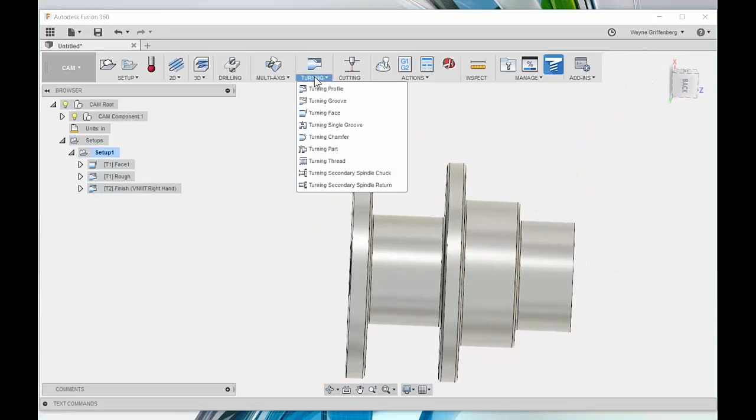So I'm going to go up to Turning, Groove. Again, the same exact workflow. I'm going to groove this area in between here. So I'm going to select the tool, and now it filters, but see, it's filtering on those tools that we're using here. I want to go into my Haas ST20Y, and I want to filter on groove tools. So if I go to type, go down to grooving, and now it's going to filter down on tools that make sense for grooving. So there's my square groove that looks pretty good.

Again, I can edit it if I need to. I can always go in and see the insert, make changes to the insert, the holder, the setup. I'm going to leave it the way it is and select it, and I get this groove tool. I can see it in the graphics view, and now in geometry I can tell it, instead of trying to groove all these places, I simply want to groove from this edge. I'll go from this edge right here, and I want to groove back to this edge, right?

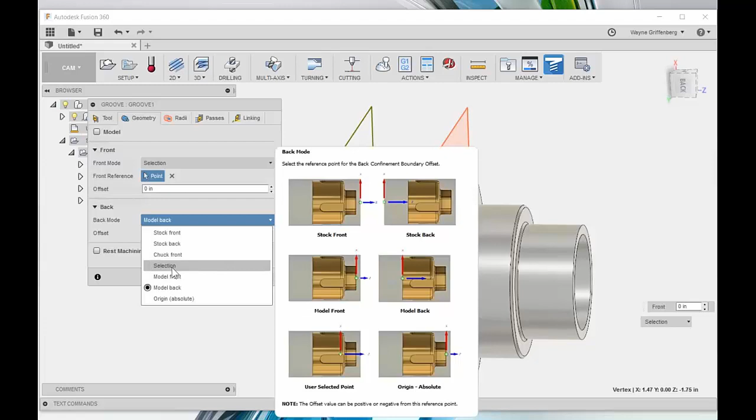So I'm going to go to selection, groove to this edge, and I want to keep the groove tool there and lead out over those two radii there. So I'm going to say OK. Before I do, in our passes tab, I can choose whether we want to do a full step down, partial, or even go sideways in between the groove. This is a pretty big groove, so I don't want to put the deflection on the tool, but if you have smaller grooves, you can easily go back and forth like you're profiling.

So up and down, I'm going to choose only down because I don't want to go up the walls and hit the back of the tool before the material's been removed. And the same thing for my step overs. I can do multiple step overs. We'll leave the roughing passes on. I'm going to say OK, and we get a groove tool path.

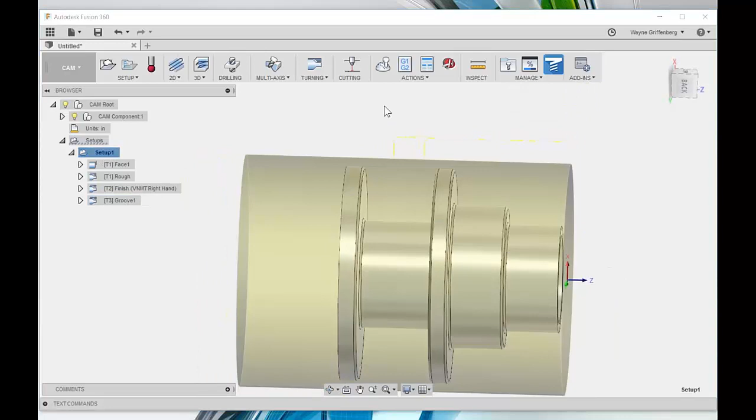Okay, let's do a quick simulation. Now, I've already seen it do the rough, the face, and all that, so I can easily do this. On my browser, I can go down and select the finish, go down and select the groove. Notice the part updates. As I select each of these, it automatically runs through and shows me.

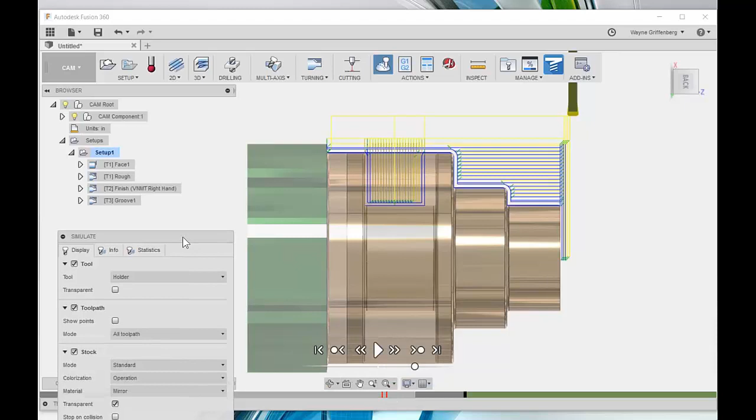I actually have some collisions there. I'm going to have to go and take a look at what I did with my tool. That's okay. So I'm going to show you what the groove looks like. So I'm going to go to, not close that out. Sorry, guys. Go back up.

I'm going to go to simulate. And again, we're going to fast forward. Another way to do that too, I'm going to move this over so we can see a little bit better. Instead of going on my browser, I can also right-click and say next operation, and then next operation. And I can play through and show you what that grooving is going to do.

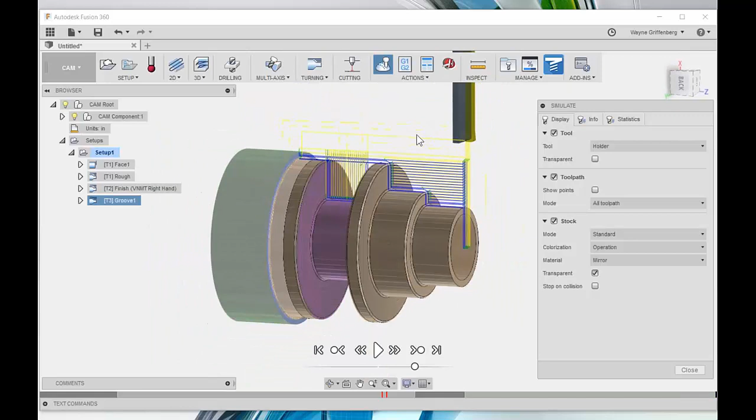And we can also do this as a peck. If you want to step down, we have features where you can do that as a peck if it's taken off a lot more material than your tool can handle. So that looks pretty good. We're almost there, let me close out.

So what I want to do is drill out this 3/4 inch hole, and then use a boring bar to bore inside of here. I'm going to walk you through those steps.

The first thing we want to do is a simple drilling operation. Same workflow, except we start and end on cycles. We don't need the passes and linking here because it starts on a G80, ends on a G80, starts on a G81, G82, and so forth.

So I'm going to select a tool. Forget what the hole size is - if I hover over, I get the feedback, oh, it's a 3/4 inch hole. In fact, any of these diameters that you hover over will give you the diameter of the hole. So I need a 3/4 inch drill. In my library, I go to select. I'm going to look for, let's say in my Haas ST20, drill, I have a couple 3/4 inch drills, and I can always filter on dimensions if I wanted to.

So I know I only have a few here, just want to show you that you can do that. It'll filter down on all tools that match that dimension.

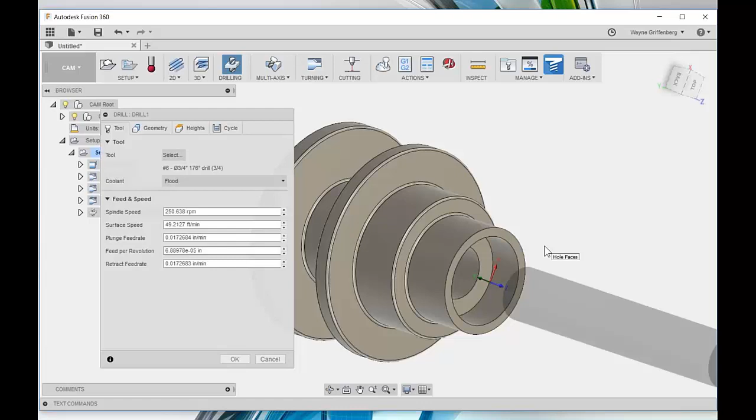So I'm going to select that 3/4 inch flat drill that I'm going to have on the axial tool on my turret. I'll select the geometry. Now I want to select this hole face, but this is important. I selected that face, but if you notice, the yellow is showing me my lead in. The green is showing me in blue it's showing me where it's going to start to feed. Now, I don't want to feed into my stock - I haven't removed this material yet, so be careful if you do that.

Select holes that are inside of your part. Here's what you want to do.

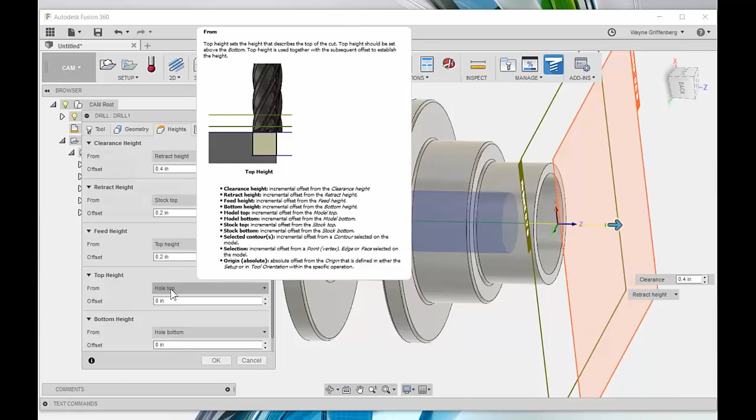If I go to the Geometry tab - actually no, not the Geometry, the Heights tab - it tells me here my clearance height, that's where I can safely retract. My feed height is at the top, but notice where the top height starts at hole top. I want to make sure I change that, not to be hole top, but to be model top. So then it will recognize that I want to start right where the model starts.

Now I'm going to lead in and start to feed into where I still have stock material. I could do the same thing on the other side, but I'll leave that. I want to make sure it drills the tip of the tool through the bottom, so if I go down to drill tip through bottom, I can add an offset. I can give it a breakthrough depth, let's say 1/16 of an inch, and I can see it's now going to break through the back of the part. You can see it graphically, that confirmation that it's going to drill all the way through.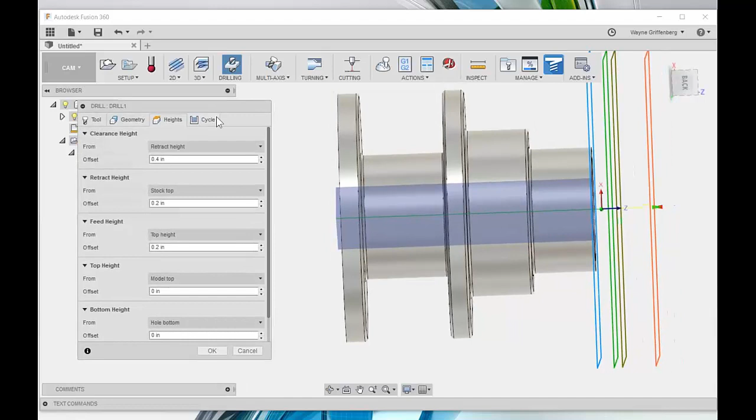Okay, so that looks pretty good. For my cycles, I can do peck drilling - if I did chip breaking, I can choose the peck depth, the accumulative peck depth, and it'll give me that code. I'll say OK, and now we're going to drill that out.

Now I want to bore this section using a boring bar inside of here. So I'm going to switch over to turning profile. This is one place where we get a lot of questions - a lot of people working with internal boring are asking how to set this up. So if I go to turning profile, notice that it wants to do an external profile tool.

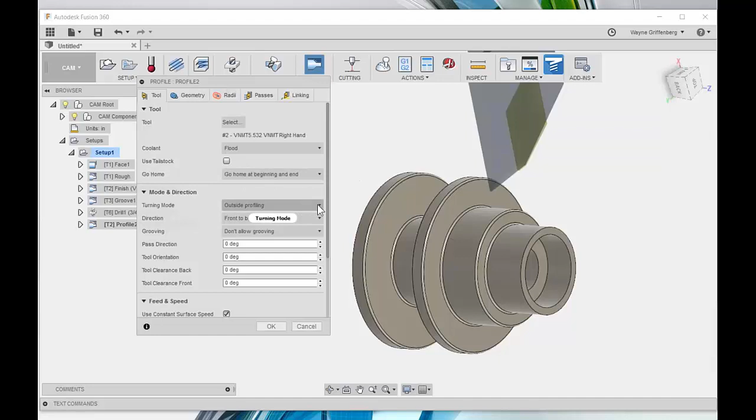So I want to use a boring bar to get inside and bore this area out. What I have to do is on my tool step, instead of the turning mode being outside profiling, I'm going to change that to inside profiling, and it drops the tool to the center line. So it now knows we're working from the inside out - we're inverting the way that we normally work from the outside in. So it selects that. Now I want to select a tool that makes sense for inside profiling.

So if I go to select, I'm going to turn off this diameter. If I go down to my Haas ST20Y, I have a boring bar in here - we can easily set one up really quickly too. So if I go to filter, I want to go by type, and go down to tools that make sense for boring. Now you can do this out of the samples library as well.

So if you go to the samples, it'll filter down on tools that make sense for boring. It looks like I probably only have one in my libraries. That's okay, we can create more. So that happens to be the one that's in my Haas ST20Y, and that's a boring bar.

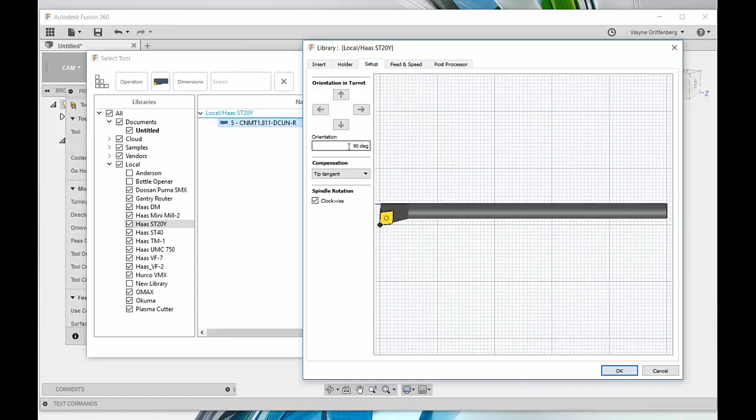So I can easily go in here and edit, and I can see what that boring bar looks like. I can change the holder type. I can change the insert type for that boring bar. And of course, in my setup, it's an axial tool. So I'll select that boring bar, and it gives me a preview of what the bar is going to look like at the center line.

Now, for my geometry, I can tell it to have that boring bar go all the way to the back of the part. I don't really want to do that. I want to select where I want the back to be. So I'm going to go to selection. I want to choose this face right here, and that's as far back as I want the boring bar to go. Now I could go all the way through the part, there's no problem with that, but I've already drilled out that 3/4 inch hole. There's no need to go into that hole like that. So I'm able to limit the distance for the boring bar.

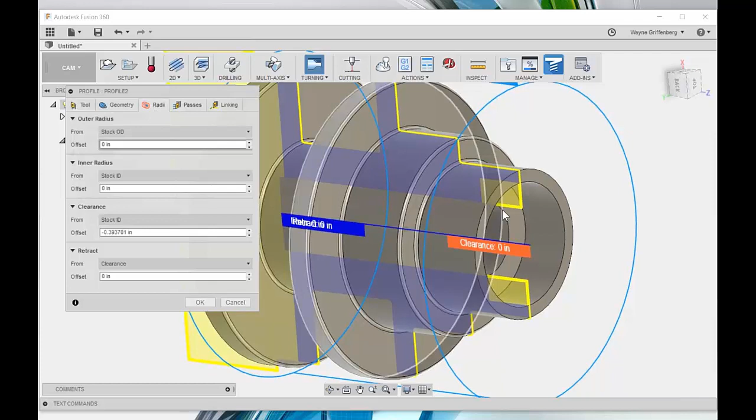Now, here's the important part, the radii. I want to work from the inside out, right? So I want to have the minimum clearance, and I want to work from the inside out, not from the outside in. So I'm going to work from the bottom up.

Now my retract and my clearance, this is as far away from the part that I can be. So my clearance, I want to make sure I'm at least well within that 3/4 inch, so I don't want my tool to hit before I get in there. So I can easily set this to a diameter. I know my diameter is a 3/4 inch hole, so I can easily set this by 0.7. So now I know I have 5 thou between where my retract height's going to be and where I'm going to start to feed in to that yellow area right there. So it's a quick way to be able to control.

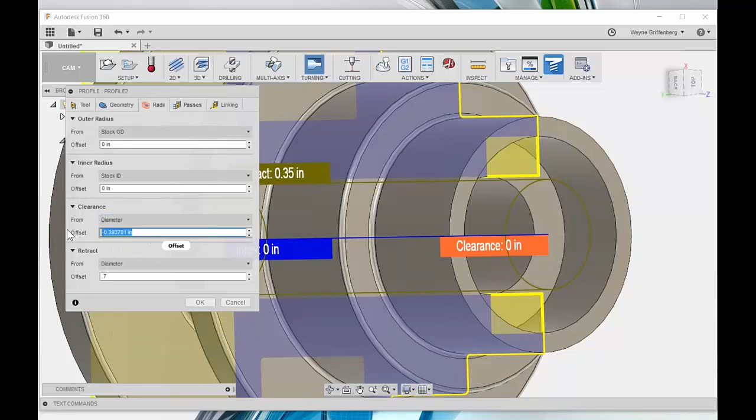Now you can also select geometry, but I like to control it by diameter, and this gives you more control over the retraction. So my clearance, I can easily do that too. I can say, I want to make sure I'm clear, and I want to be able to go 5 thou below that, so I'm going to put 0.65. So now my clearance is going to come. I can make that as small as I need it to be. I can make that a 1/2 inch in diameter, as long as I'm not crossing over that center line. So that's as far as I'm going to be clear as my part retracts, or my tool retracts out of the material.

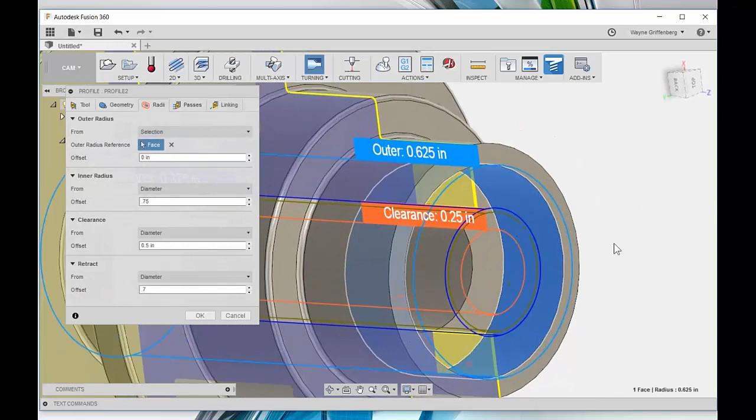So the next thing I want to do is my inner radius. Of course, I know that's going to be 3/4 of an inch. And now my outer, my stock OD, is going to be the furthest out I want the boring bar tool to hit, which is that face right there. So I can easily select that. I'll select that face, and now I'm working from the inside out, my smallest clearance, all the way out to my widest outer radius.

And now if I hit OK, I get an internal boring operation. So now I'm working from the inside out. I can see my retract's going to be off of my stock, and I know where I'm going to start feeding is going to be only in the material that's left. So work with diameters, you don't have to, it's just the way I like to work. And you can always use the geometry that you're working with as well.

Okay, so we're at the top of the hour. Hopefully you guys are able to stay with me for a little bit. It does look like we do have a question.

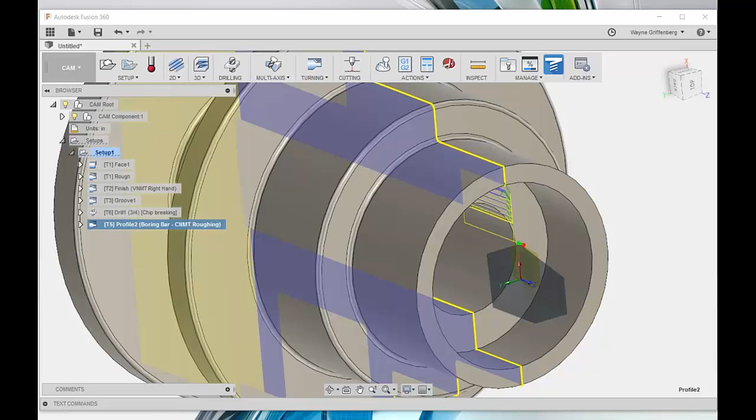Can you dimension in diameters rather than radii? Yes, yes you can. That was Ed who had asked a question. Yes, you can dimension in diameter as well. You just have to set that in your setup initially.

Okay, so real quick, I'm going to make a super fast change. We're going to get some code out. So let's get some code out using these profiles. So I'm going to go to Setup, I'm going to Post-Process. Today I'm working with my Haas ST20Y. So it looks like I don't have a post in here for the Haas ST20Y.

You can easily do a quick search on our online post library. So you just click this little link here, and I can filter on type for turning or mill turn, and I can find, there's my Haas ST20, ST30Y, and I can download those directly. I can even see a sample of that code really quickly, of what the code looks like and what I can expect.

So I can download that, and add it to your personal post folder. If you're going to make any changes, I highly recommend using your personal post folder. That's where I downloaded it to, and I can easily switch over, and there's my Haas ST20Y post. So let's post out for that machine. I'm going to go down here to post, save that file, and overwrite one that I did earlier. Give it a second. It's going to open in Brackets, and now I can save this onto my thumb drive, bring it over into the Haas control, and start running this part right now.

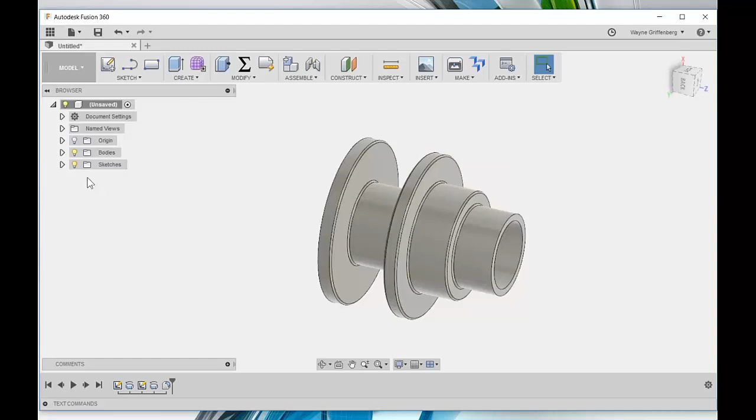But I just realized something. It's the wrong part. I just got an update on my napkin sketch. I just realized that the team we're working with to prototype it has to make a couple changes. So we're going to go in, and I'm going to show you what those changes would look like. So as I switch over to the model workspace, I can go into the sketch we use to make the profile, and I'm going to make a few sketch changes in here.

So my outer radius here is going to be 0.875. My inner radius is going to be a half of an inch. Actually, we're going to make it a little bit bigger. We're going to make that 3/4 of an inch. We're going to make the depth go a little bit further, so this depth is actually going to go in an inch. So we're making some pretty major changes here. And my overall diameter of the boss right here is going to be 1.25 inches. Okay, we're going to stop that sketch. We made some pretty significant changes to the part.

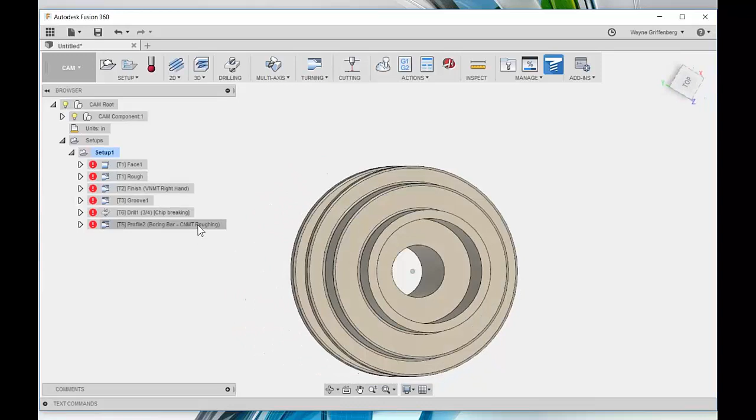Okay, I'm going to go back into the CAM. Notice all of our toolpaths are now red. So we have this red circle with exclamation point. Our face looks good, but our rough is going to go right into the part. Our finish, our groove looks okay. The drill and our profile is not going to be big enough. So we made some major change.

Now if I go into Setup, right-click, Generate Toolpath, or hit Control-G, it automatically updates every toolpath to the geometry changes. We don't have to go in and reselect anything. Any changes we make, it automatically updates and recognizes on the CAM side. So complete integration between the CAD and CAM side inside of Fusion.

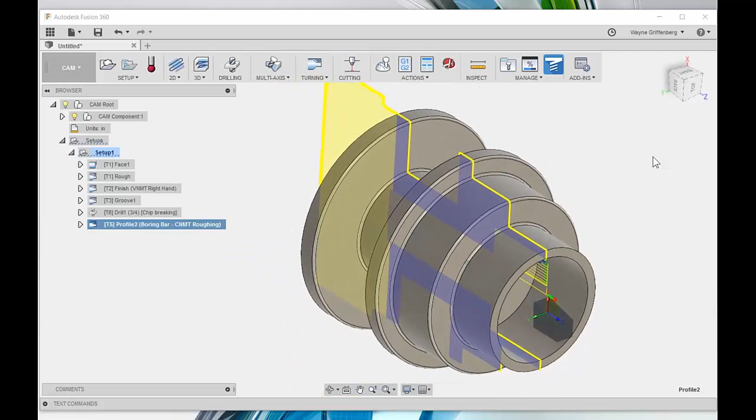All right, so we walked through how to draw up a part really quickly. We were able to model it. We made some revolved base, and we revolved some cutouts. We saved the part. We added some fillets in here really quickly by direct editing. We came into the CAM side, and I showed you how to set up those toolpaths to be able to turn a simple part like this, including drilling and internal boring. And we were able to get some code out for the machine. We made a change and saw that change happen instantly.

So now I'd like to go in to update that posted code, save it, and now I have the correct part that quick, so we can now run that prototype in the machine. Super fast changes you can make in the CAD side, updates on the CAM side, really easy to use. Each toolpath has the same workflow. Really super easy to learn and easy to use.